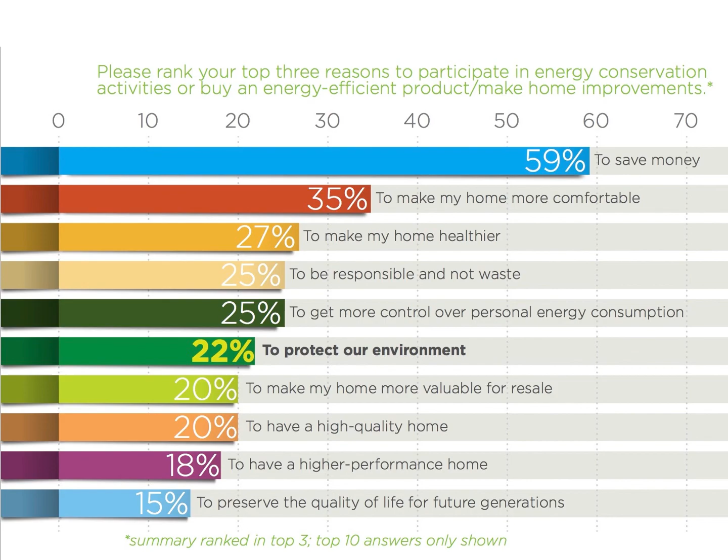People immediately think of energy, and the main reason they would invest in them is, they say, 59% to save money. If you look at the term high-performance home in this survey by the Shelton Group, you see it's way down second from the bottom. To have a high-performance home is only 18%. The only thing it beats is that clearly unimportant to preserve the quality of life for future generations. And the point is, nobody is going to invest in a high-performance home these days to save energy, because energy is so cheap that there's no payback. It would take forever because gas is cheaper than anything you could do in your house.

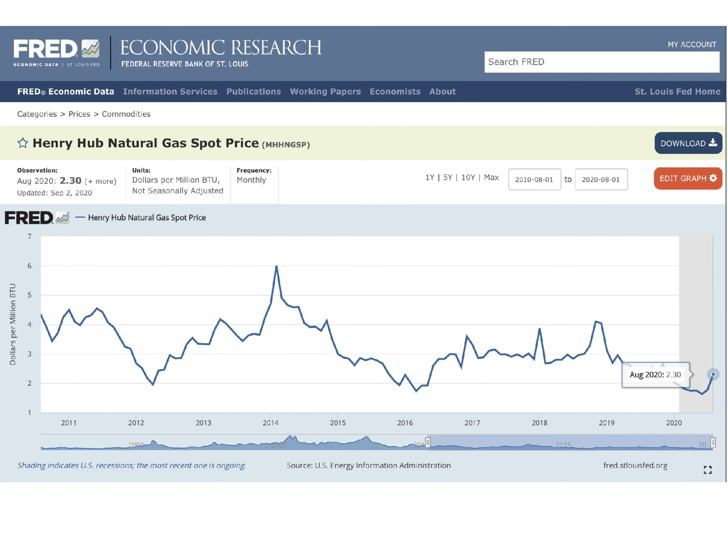There was even a survey done a couple of years ago that looked at this issue and found that there were some people who would put solar panels on the shaded sides of their houses so that their costly investments are visible from the street. They called this behavior conspicuous conservation. So this is what they want, a sort of ordinary looking house with visible signs of their investment in the form of solar collectors. Which brings us to the Passivhaus, which I'm a big supporter of, and which is, I think, the best approach to making a high-performance home.

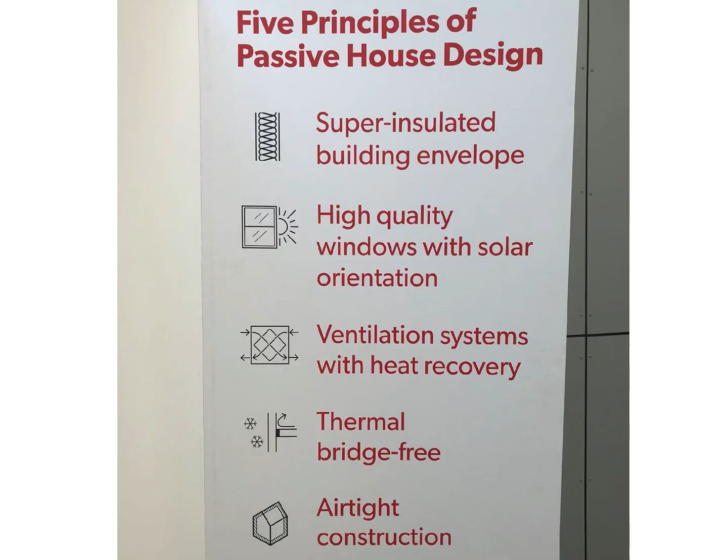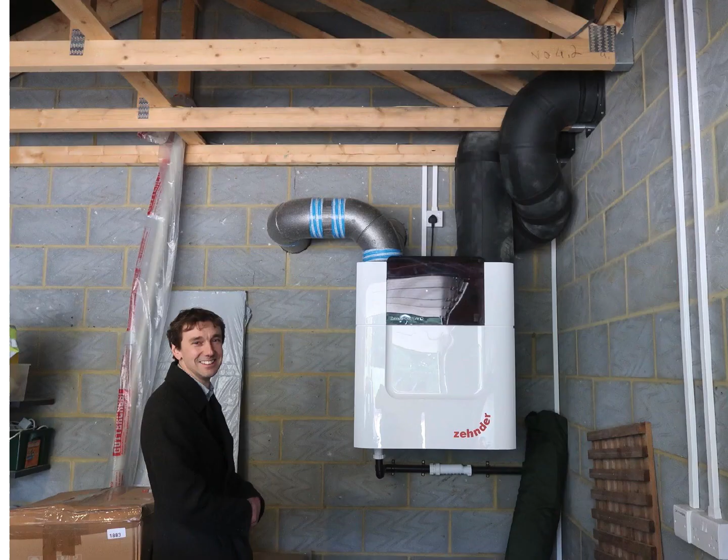But look at what the 5 principles are. Super insulation, high-quality windows, ventilation system with heat recovery, thermal bridge-free and airtight construction. You can't see any of these. You can't show someone the way your wall is built from the outside. They just see the siding. You're certainly never going to be able to show anyone the Intello Smart moisture and air control barrier that's inside the wall. You maybe could, like my friend Ben did here north of London, show me your heat recovery ventilator system, which is that key part of air exchange, but most people aren't going to be as impressed as I am with this kind of thing.

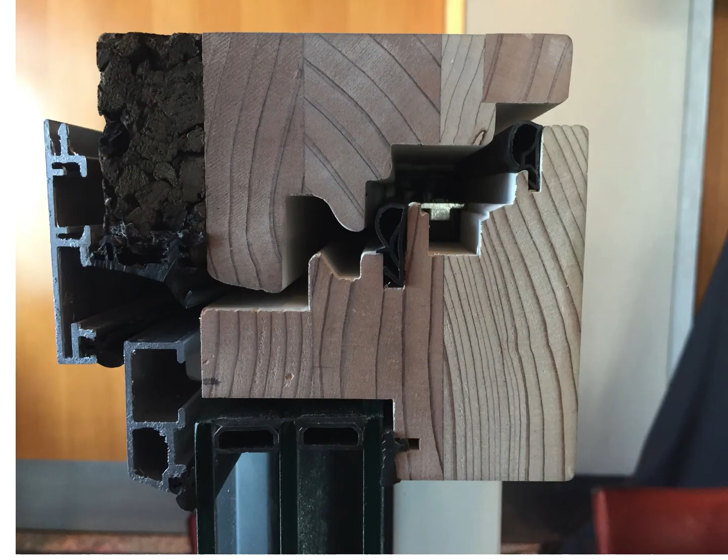You don't have handy slices of your high-quality windows out there to show people, because who has that hanging around their house? The only way that you can actually see that a passive house might be a passive house is that they do sometimes look a little bit different. For instance, the north side of the house might not have very big windows, because very good expensive windows are still worse than a lousy wall. So you tend to minimize the amount of windows. They're also very expensive. Passive houses also often tend to look a little boxier than normal houses because every corner can be the possibility of a thermal bridge. You've got more surface area, more insulation, so there's a cost factor in it.

Now, I've written before on TreeHugger that buildings can be BBB, or boxy but beautiful, as Bronwyn Barry calls it, if you have a good idea. But what we really have to do is, just as I've also said, start accepting that it's a different kind of aesthetic. Dudley Moore did a movie in the 80s which got picked up by Volvo in their ads saying they're boxy but they're good. And I thought the tagline, "This is not a smart time to be sexy with so many new diseases around," was probably as appropriate today.

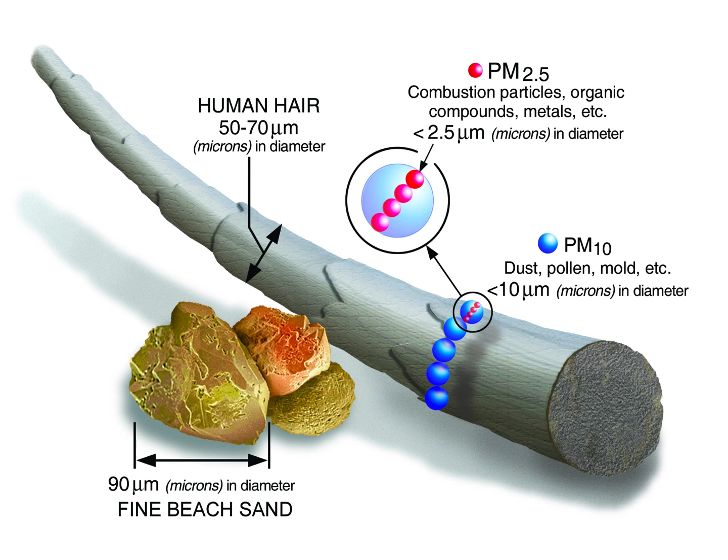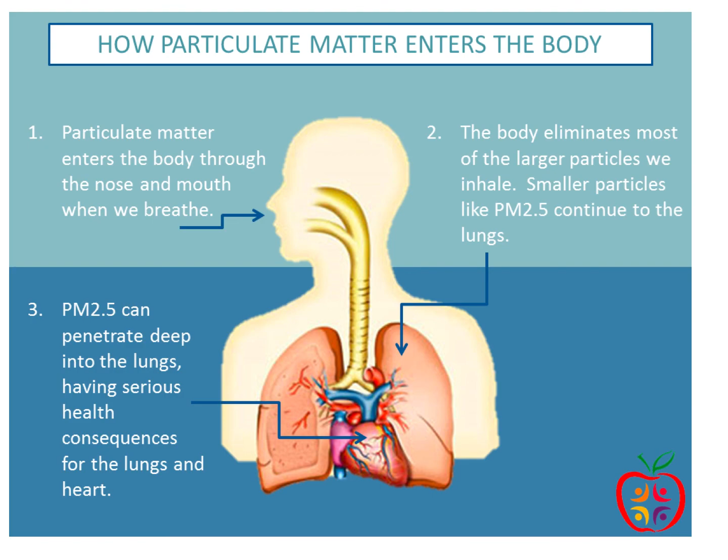And these are really, really tiny particles, way smaller than a human hair. They go directly into your body. After you breathe them, they go through the membrane, through the lungs, into the bloodstream, into the heart, and even, they believe, across the brain barrier into your brain. And some studies and doctors say that they have the most impact on our health of almost any pollutant, right up there at the top in terms of disability adjusted life years effect on your life.

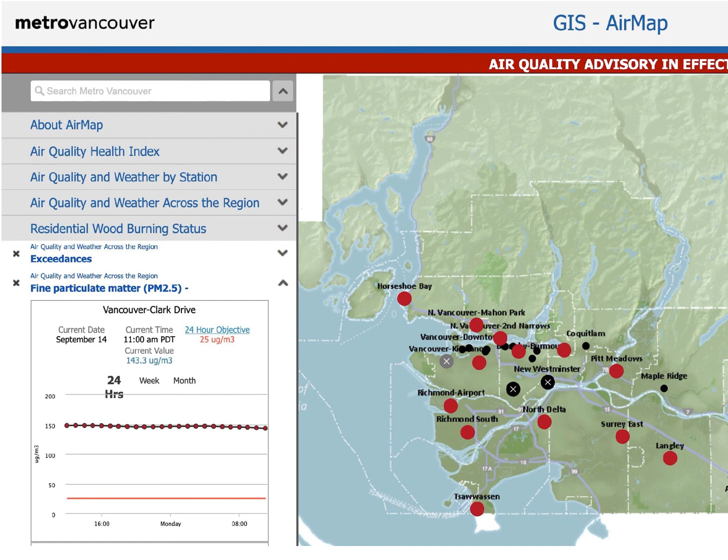There isn't even a real standard in the United States. Canada and some other countries have a recommendation that over 24 hours there should not be higher than 25 micrograms per cubic meter in the air. People in Vancouver at the time I was doing this presentation were living and breathing in 143.

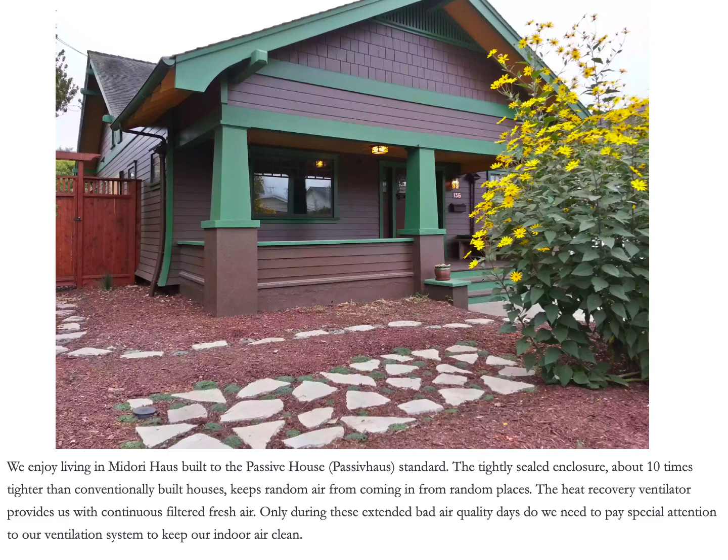Passivhaus is an approach that really can help because the house is sealed. As Che, the woman who built this house, the Midori Haus, said, the tightly sealed enclosure, about 10 times tighter than conventionally built houses, keeps random air from coming in random places. And the heat recovery ventilator provided her with continuous filtered air. Only in the worst days did she have a supplementary filter. But that's anecdotal from her.

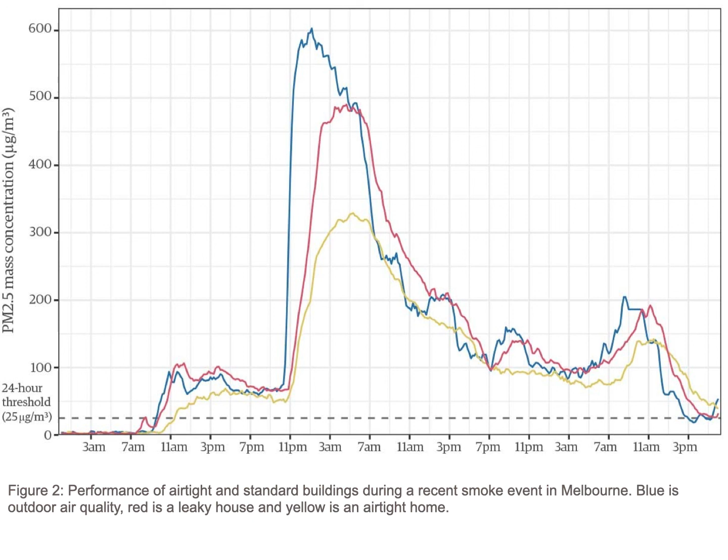This January in Australia, there were some real studies done, and they looked at the effect of Passivhaus on air quality inside during a smoke event. Outside, you can see it's up at 600 micrograms per cubic meter. Inside the red line, which is a conventional house, it's at 500. The passive house is half of what it was, but still higher than it should be.

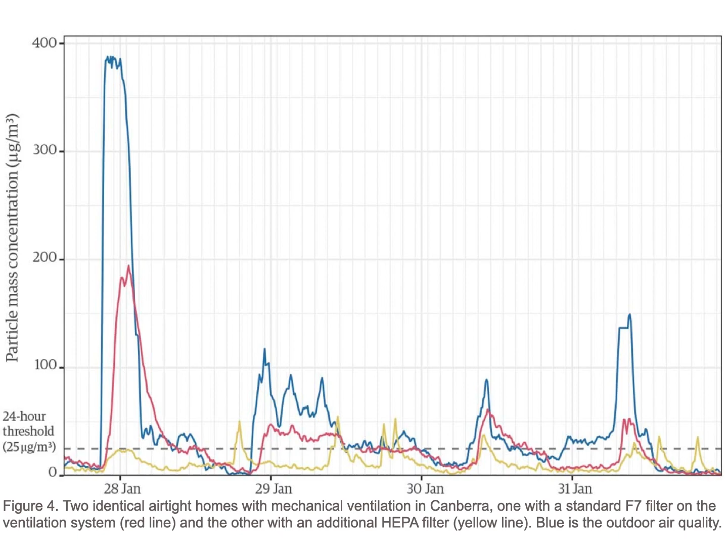Then we have the other problem that's happening, the other tiny particle that's flying around right now, and that's the coronavirus. And the same sort of rules apply. Although it's different in that the coronavirus really travels on micro droplets of moisture. It doesn't sort of travel on its own. And what we have to do is avoid recirculation of these things. So the recommendation is no recirculation and lots of ventilation with fresh air.

The trouble is, in most of our homes and most of our buildings in North America, the air system that heats and cools the houses also provides the ventilation. So if you're in a building with lots of different people, or even in your house, if someone's sick and everybody else isn't, it's quite possible that it goes through the return air and it's all distributed. And the amount of fresh air that you're getting into the home is either random or a really small proportion of the air, because our systems are built on recirculation.

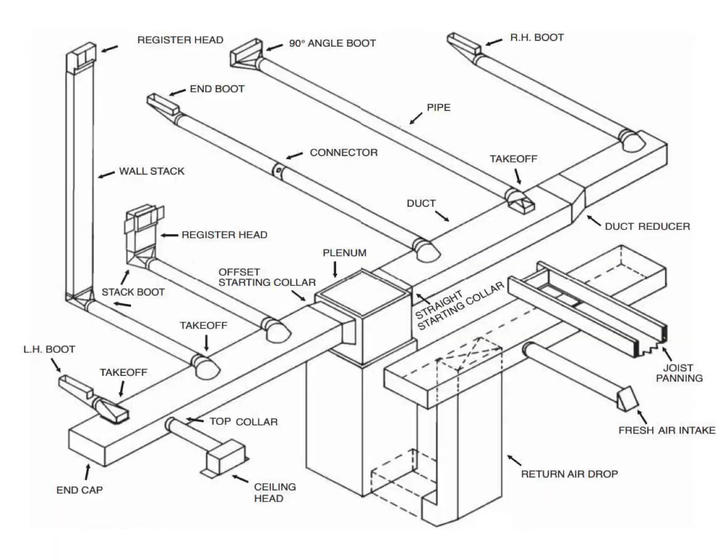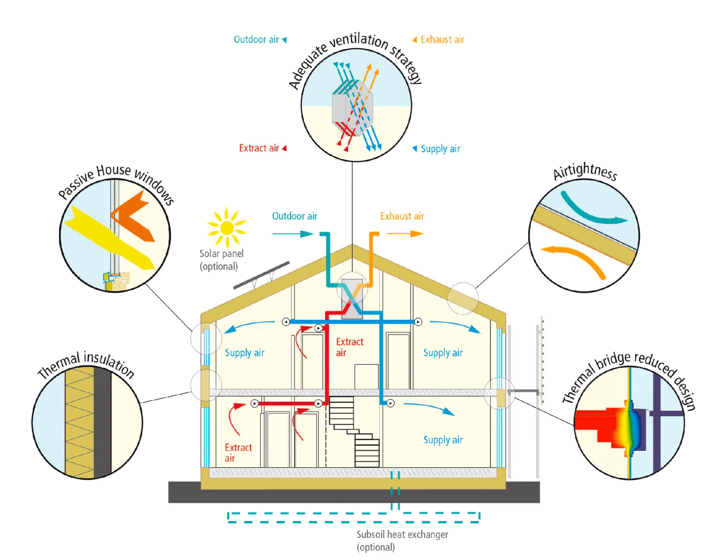The passive house, on the other hand, is designed so that the ventilation system is completely separate from the heating and cooling. So you can have entirely fresh air brought in, while you exhaust all the air from your bathrooms to the outside. And therefore, you always have fresh air delivered through the heat recovery ventilator, where inside air and outside air transfer the heat, but they don't transfer the air.

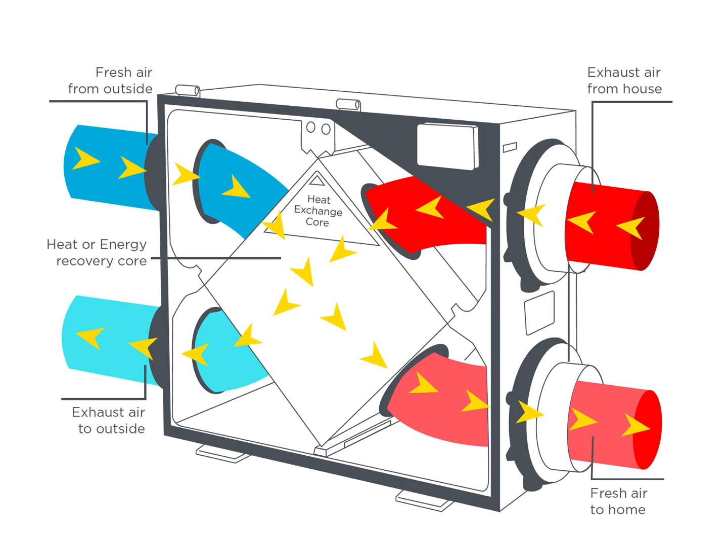Some people, like the Australians mentioned, are putting HEPA filters on the system. The problem with this is that the HEPA filters really cut down the amount of air that goes through. There's a lot of resistance, so you need to have a more powerful fan, and there's more energy consumption from that. And the Australians suggested only stick in the HEPA filter when you really need to. You also have to be sure that your system actually has the power to push the air through the HEPA filter, which a lot of systems do not.

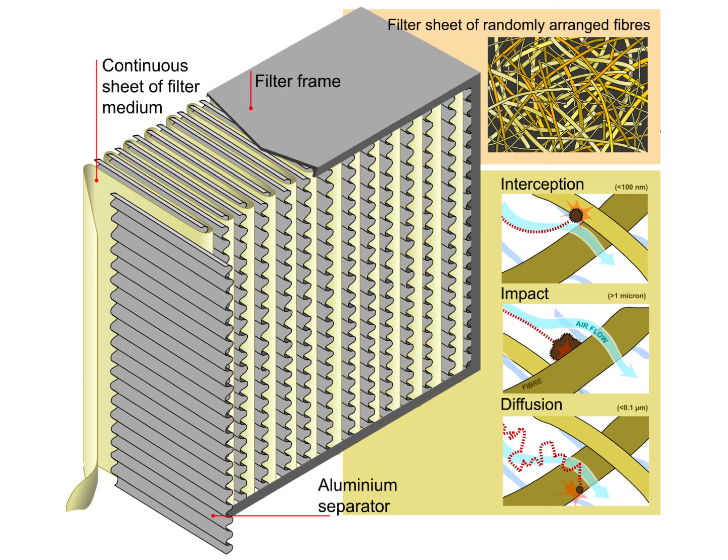There's another issue that affects where the virus is affected, and that is humidity. Studies have shown that when the air is dry, people get more infections, and one of the reasons is that the droplets stay in the air. In hydrated air, in moist air, the droplets fall to the ground much more quickly because of the air essentially being more dense.

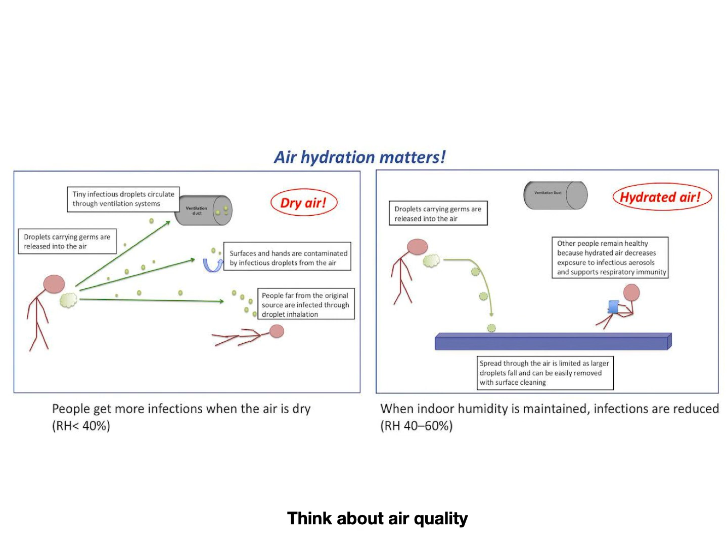The problem in normal houses in colder climates is that the humidity in winter gets quite low, because otherwise you get condensation on the windows and possible mold growth on the walls. And so the thing about a passive house is, because the walls are so warm and the windows are such high quality, you can keep the humidity up to between 40 and 60%, which for all kinds of reasons, bacteria, virus, fungi, allergies, respiratory infections, is where you want to be for optimum human health and comfort.

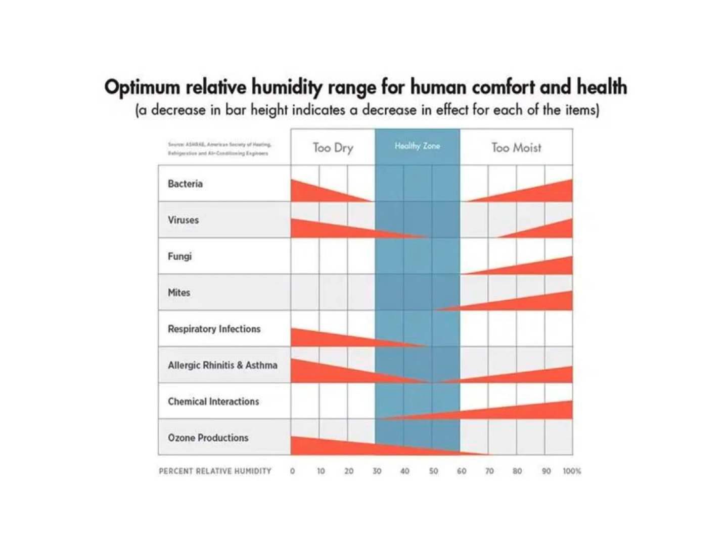So in summary, these are the points that I think we have to make about high performance houses. And I don't really even mention energy here. I take that just as a given. The first and most important one in today's world, where we're spending so much time inside, is comfort. And when you're in a passive house, the windows and the walls are almost the same temperature as the room.

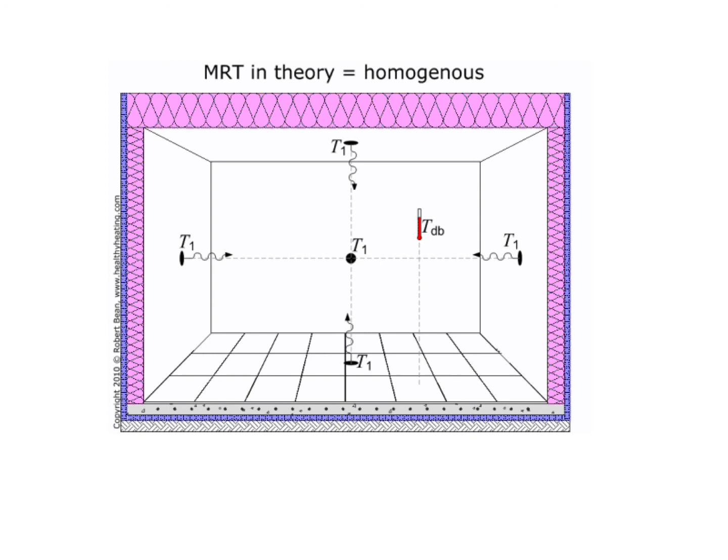It's a thing I won't go into great detail about, called mean radiant temperature. If the walls are the same temperature as you are, then you feel warm. If the walls are colder than you are, then your body is losing heat to the wall and you feel cold. It's the same thing in reverse. If the wall is hotter than you are, you're going to feel hot.

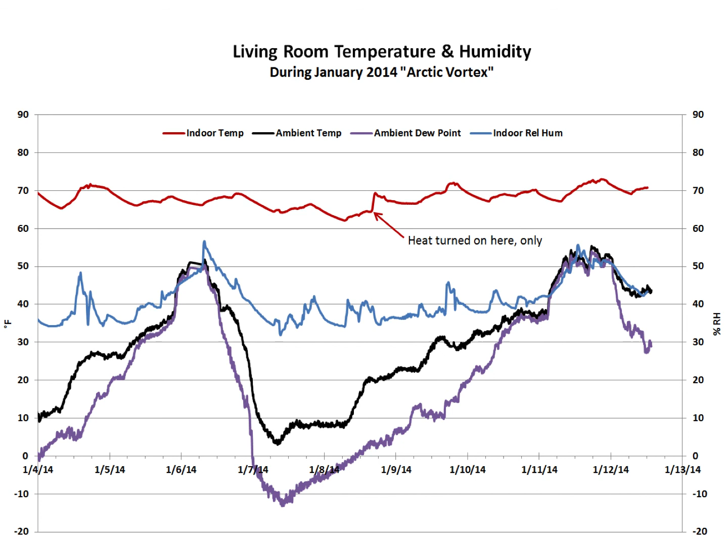The other thing is security, that a passive house with its thick walls and insulation essentially works as a thermal battery. So if you're in a really cold climate and the electricity or the heat goes out, you can see, like this one from the Arctic vortex, that it got to like -10 Fahrenheit outside. And yet the people inside this house, I believe it was in Maine, didn't even turn the heat on until they were 5 days into the vortex because the house, a thermal battery, stayed warm.

And if you're in California or somewhere like that, and the electric company turns off the power to keep the wires from setting more trees on fire, your house will stay cooler because the thermal battery works both ways.

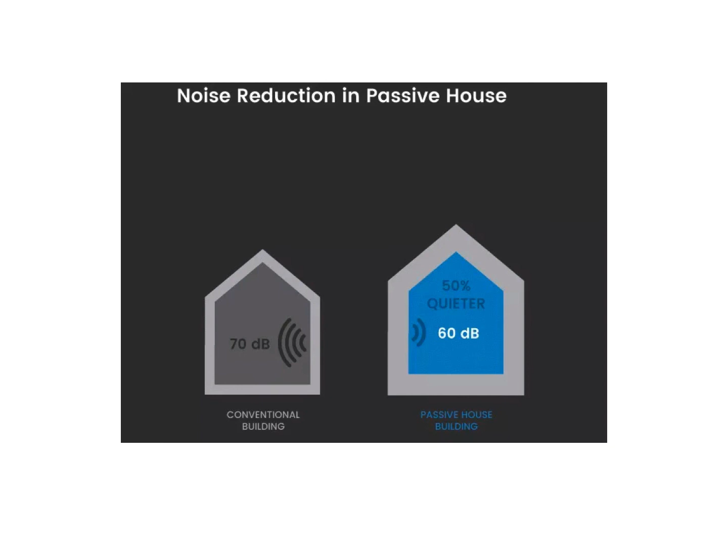Another benefit is quiet. I was in this passive house in Brooklyn where an ambulance and a bus went right by on the busy street in front. I couldn't hear the bus at all. The ambulance, I could barely hear it. And that's because there's noise reduction, effectively 50% quieter inside a passive house compared to a normal conventional building.

And then there's, of course, what I think now is the very big one, the indoor air quality. The fact that the passive house being airtight and having the filtered heat recovery ventilator system means that the indoor air quality is significantly better than the outdoor air quality. It also works as what's being called hygiene ventilation. The passive house could be effective in the fight against COVID-19 because you're having fresh air and no recirculation.

When I did this presentation the first time, Dr. Feist made a comment which reiterated these points, but also reminded us that this is a cure against the causes of climate change because the houses are so low in their emissions. They're not adding to the CO2 that's creating this problem.

Back to Suzanne Shelton, who did these surveys that I like to talk about all of the time, where she pointed out that the global pandemic of COVID-19 has caused massive shifts in thinking and behaviors globally, causing many of the ideas and actions that were once considered fringe to become prevalent among mainstream Americans. High-performance buildings in general, and passive house in particular, used to be considered fringe. They're not anymore. These days, with the climate and the health challenges that we face, they should be considered standard practice. Thank you.